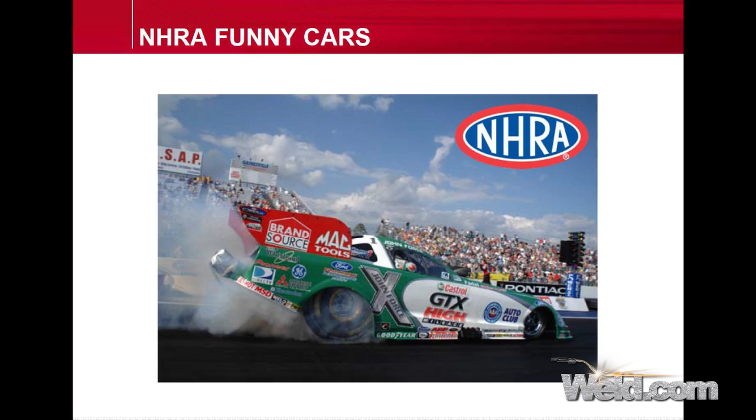But I just want to show you a few people that are using it right now as we speak. Okay, now this particular car is a funny car. It has the same engine, 10,000 horsepower, but it's shorter. Now this car rarely has a problem because it is shorter and it takes the torques and the loads and everything else. But before we go into the next slide, I need for you to show me something that happened back in 2006.

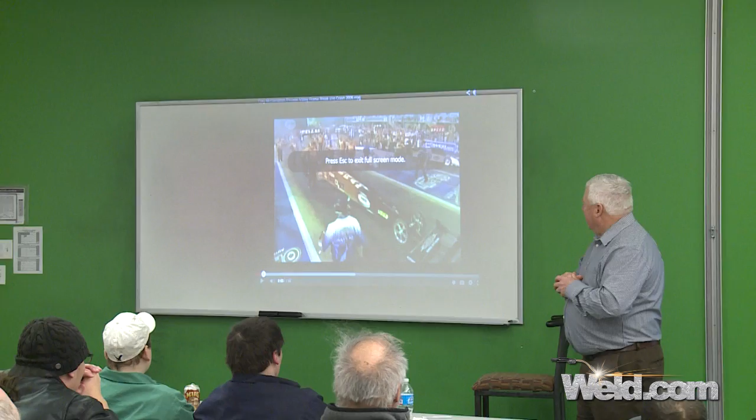Now this happened to be a guy, his name is Cory Mac, and he was driving this top fuel dragster, the long one, and he had a failure. And I want to see if you can recognize where the failure took place, because this is all part of this class. You have to pass this test, okay? There's only going to be a couple questions on it.

Cory Mac called me. He said he had a bad crash, and you'll see it in a minute. But he said it's really strange. The tires have a tendency to blow in these cars. They're running at 9,500 RPM. So when a tire blows and it just gets a little bit of rubber slapping, we've lost drivers because of that. So now what happens is almost every car that has a crash, they blame it on the tire.

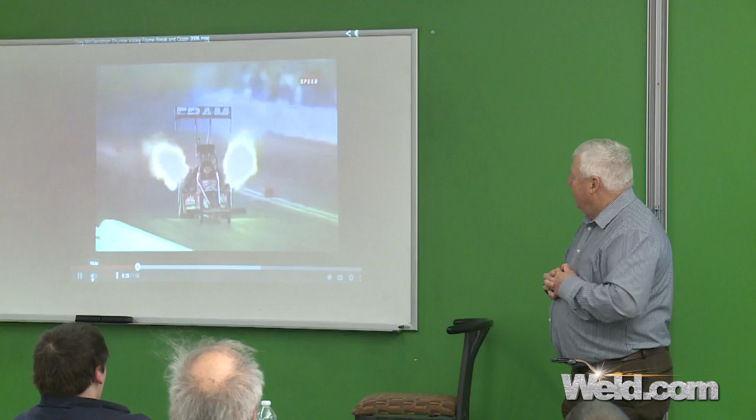Now watch this. Oh my. 300 miles an hour, and he has this type of a crash. Now that you know that he called me and he said that he felt his butt dragging on this crash, look real close at the bottom of the car. Something is dragging there. You see it?

Now look at Cory. He's up here. He's almost at 300 miles an hour. That's not a good day.

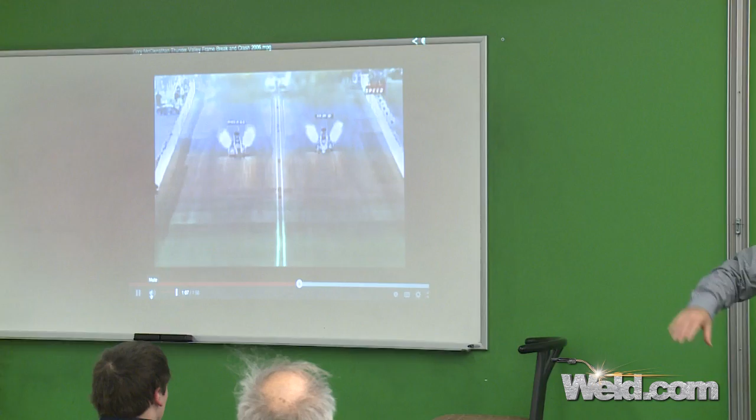And they'll show you one more time, I think. These are only like little 2-minute clips. It is a good day he survived. He did, and it was unbelievable. His sense of humor right after that was as normal.

I think I'd pack it in about that. What do you think, Marty? Yeah, oh yeah.

Now, this leads up to a crash. I got to tell you about 2004, St. Louis. There was a guy by the name of Darrell Russell, and Darrell died in his run. He had a tire blow, and the explanation was that it's just what happens in racing. It happens. He blew a tire, and it was blown off. There was no longer a safety issue until this crash came up.

Now we're 2006. Still, nothing was done because nobody knew to do anything. Now, we know that there's a problem here, because the frame is so long, we know that it may snap, it may twist, all kinds of crazy things can happen. But in 2007, and we just keep going up in the years, still nothing has happened.

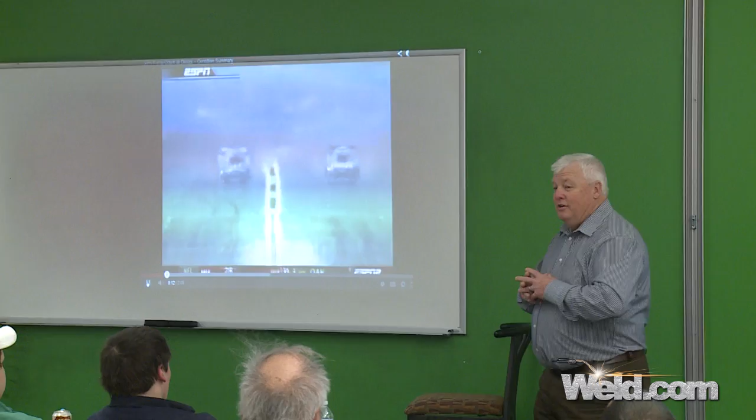I want you to watch it very closely, because when he gets to the finish line, watch the camera and how it zooms in on the car. And just so you know, John Force isn't with the car. So he crosses over, he hits Kenny Bernstein. Had a bad day there. The safety team chases the car.

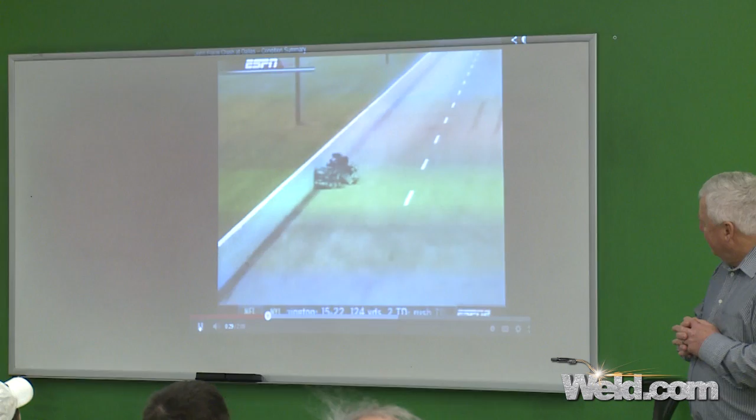I remember that race, yeah. Okay, so the safety team, he gets there very quickly. He's not in the car. So let's watch it again. Watch what happens to the back half of the car, because the camera guys don't even catch it.

So he hits 315 miles an hour. He hits a button. We have two parachutes that come out. They don't come out at the same time. They're offset purposely. So they come out, and the G-force, the reverse G's, is so much that the car splits in half. He stays with the parachute and the two back wheels.

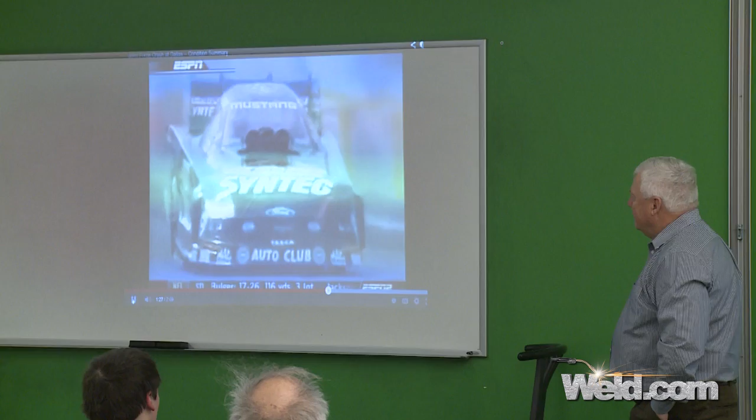So he stayed with the parachute. He came down, his knees were dangling over the frame. When he came down on his kneecaps, hands and knees, he had leather gloves, which did very little. He had a broken ankle, it scraped off his kneecaps. He was in bad shape.

And it was kind of crazy because what happens in a crash like that, it goes through a full investigation. And believe it or not, they're insured. These guys are insured. So the insurance company comes in and says, don't touch this car, leave it alone.

We're going to find out, we're going to get to the bottom of this, because we're having to pay out all these big dollars. They investigated for about 3 months and came up with nothing, zero. It's racing, tire blew - same excuse you hear all along. All along it's been the tire.

Until John Force called us directly. He was in the hospital, no longer in a coma, he was in pain, but every once in a while he'd hit the button and the morphine would go in and he'd laugh a little bit. So he called us and said, hey, you guys still up for the investigation on this? We said yeah. He said, I'm mad as hell, I lost my godson, I damn near lost my own life. Is there anything you can do to diagnose what the problem is? I said, we'll give it a try.

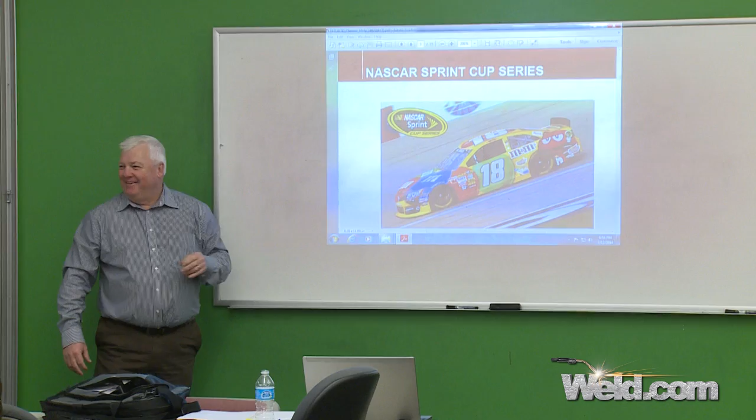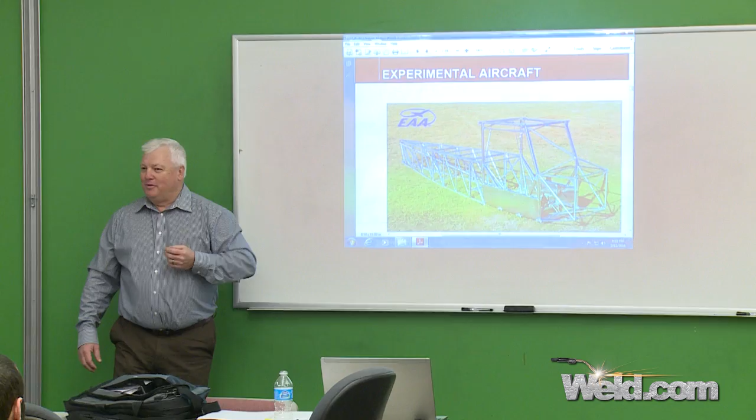IndyCar uses 4130 Chrome Moly. Keep going, next. You know, these guys, that's the bad guy - they're starting to use 4130 Chrome Moly. It took many years. Go ahead to the next one. Experimental aircraft, they use 4130. Go ahead to the next one. Okay, I'm going to stop here for a minute, we'll go back to this in a minute.

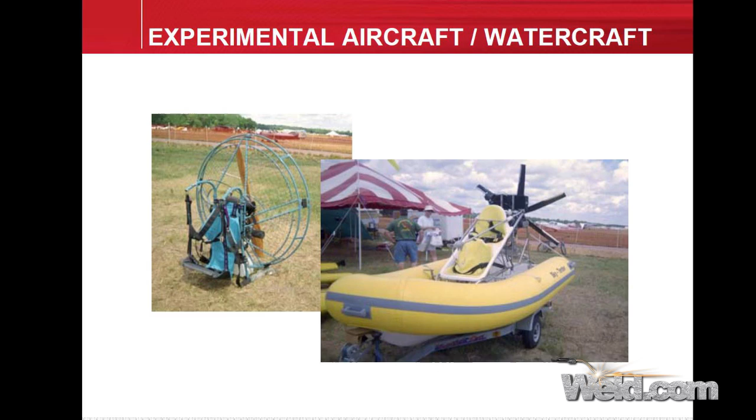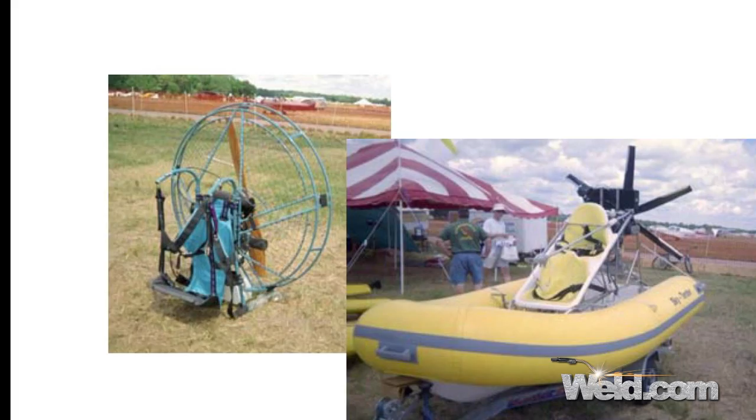This guy right here built his own powered parachute. He won the long distance contest. This particular parachute is a strap-on, you put it on your back. It's about 28 horsepower, and he's got hand controls. He's got the parachute on the ground, and he takes off running, increasing the horsepower or prop speed on his back. By the time he hits step number 6, he's airborne - he runs like crazy, then boom, he's up, over the trees and going. This runs at 26 miles an hour, not very fast, can't get any more out of it. 26 miles an hour - I happen to know, I own one.

But this is crazy - if you build your own, boy, you better make sure you welded it correctly. So the guy's sitting there with this little dinky trophy and the biggest smile on his face. He said, I won the long distance contest. I said, from where? This was Oshkosh, Wisconsin - 800,000 people go through there. He won the long distance contest for powered parachutes, meaning he left his house and went further than anybody else. I said, where do you live? He said, Chattanooga, Tennessee.

700 and some odd miles. Chattanooga, Tennessee, 26 miles an hour. Now what happens if you get a 30-mile-an-hour headwind? You're going to Florida. So I said, you know what, I got to ask you, how did you plan this? And he says, it wasn't hard, he just follows the highways.

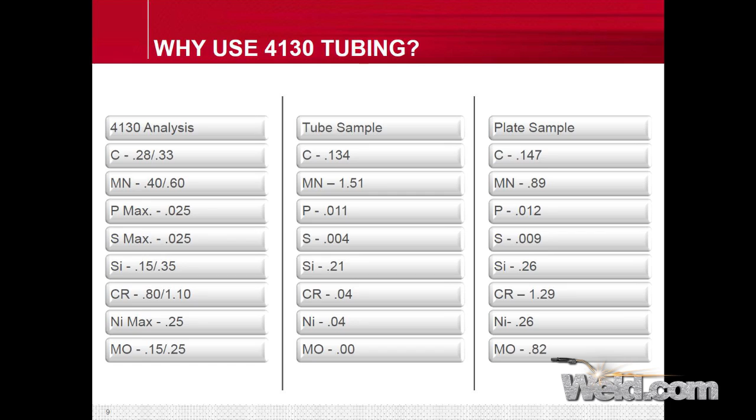Okay, now this is really getting to the crux of metallurgy and what things are all about. We're going to talk about this alloy only, right here. There's a couple other samples, and metallurgically we test them out, and we don't give them a stamp of approval until they've gone through thousands of hours of testing. These other two alloys, everybody's trying to knock off number one. 4130 still is number one.

Now, what makes it so valuable? And this is on your test, just so you know. 4130 Chrome Moly has got high strength. So why did you buy 4130 instead of mild steel? They look the same, they smell the same, they weld almost the same, but one's stronger. So why would you spend twice the amount of money on 4130 as mild steel? Any idea?

Lighter. I'm going to use less to get more. You can buy thinner wall material, and your car is lighter, your aircraft is lighter. So it's strength to weight ratio. So if you want to improve anything in racing, you go lighter. And the only way you can do it is to take a look at the metallurgy, and we're going to show you what that is.

They hear about it all the time, but this is really what 4130 is all about. It has a carbon content that is somewhere around 30 points of carbon. Doesn't mean much to you yet, but it will. It has a few elements in it that are pretty normal. See the CR right here? That's chromium. So if you hear the term Chrome Moly, it's not like it's got a lot of chrome in it, it's got 1% chrome. And it's got, look at this, moly, a quarter percent moly in it. But when you take all those ingredients and put them all together, you get some pretty good properties.

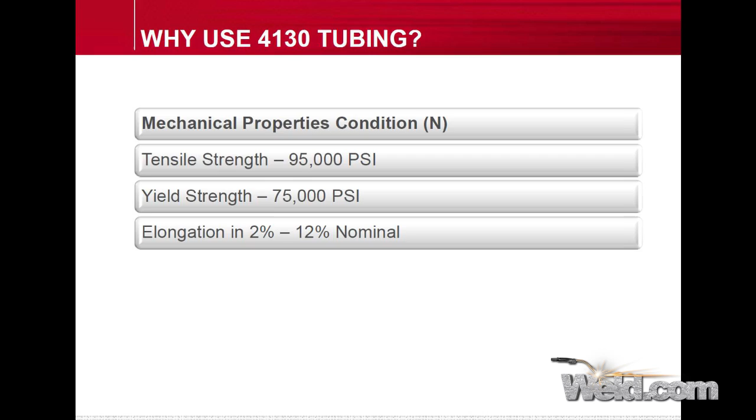So let's go ahead and show the next slide. Here's the properties that you get. You get tensile strength and you get yield strength. Now I want to show you what the difference is. Tensile strength, remember that, 95 KSI, thousand pounds per square inch. If you put this on a machine and clamp onto the material and pull it, that's what it'll measure.

Now this material will actually start to give up the ghost before that. It'll start to stretch and get plastic. It'll stretch and stretch and stretch. When you see it stretching, it's at 75,000 pounds per square inch. It's pulling, and then boom, it'll quit. It'll give up, it'll break. And that's your elongation. So this material has about 12% elongation, whereas a rubber band has more.

So it's not just going to snap, it's going to move and then snap. And that's important. We're talking about NHRA, what happens when they drop the clutch? They need something, they need to be able to flex. They can't have it rigid. If they have it rigid, it's going to go boom, just like that.

So just know, this is a condition called the N condition. So 4130 in the N condition. So we bought that because we want high strength, lightweight. So go ahead to the next one.

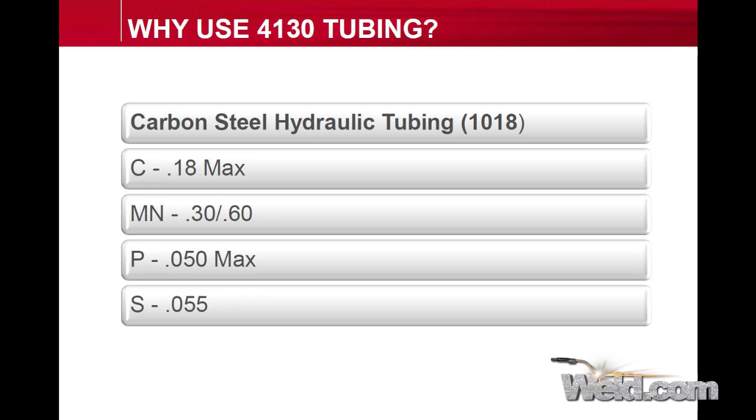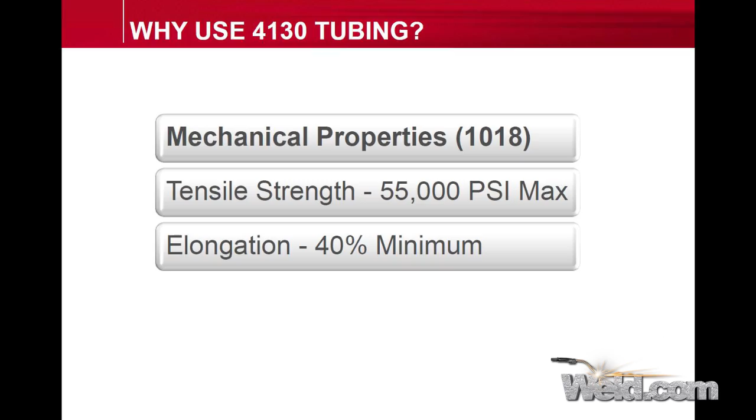Okay, now let's take a look at tubing, mild steel. You can go down to any metal mart and buy this, 1018. The only thing that's in it is a little bit of carbon, 18 points of carbon. These are all just elements that are there for the processing of steel. That's it. So let's see what the properties are. So what did we say 4130 was? 95 versus this right here, 55. So you can reduce the wall thickness considerably.

You can almost cut out, I'd say roughly about 30 to 40% of your weight just by going to 4130. Just like that. And now you got a fast car.

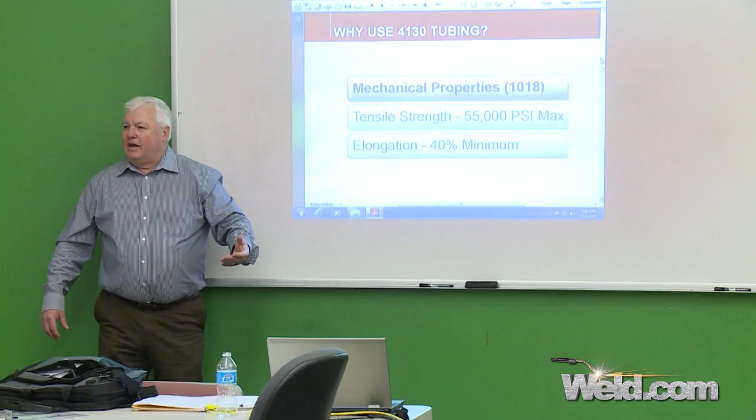Now this right here, the reason it's so attractive, notice this, 40%. What does that mean to you and I? That means you can take this tubing, mild steel, and bend it, do all kinds of things. But is it strong? No, not very strong at all. Unfortunately a lot of roll cages get made of this, and it's a false sense of security, because as soon as the car rolls, it snaps off the cage. It doesn't have the strength. It looks good, it was easy to bend. That should tell you something. If it was easy, don't do it.

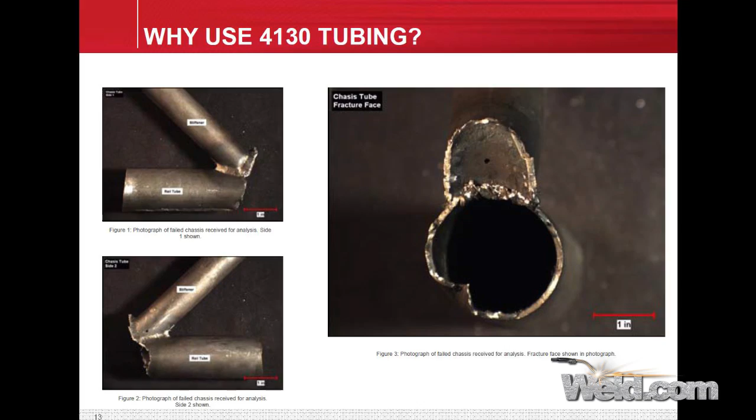Okay, now we're going to get into a crash analysis. When we cut a section out of this car, this is what it looked like. This is tubing, and you're going to see clusters of tubing, a main frame, and tubes coming in at different angles. So that's what we did, we cut into a couple of different tubes. Our whole objective, first of all, is just to look at it.

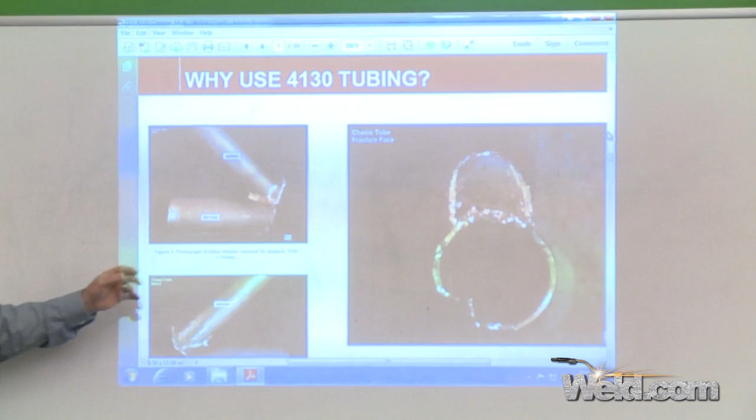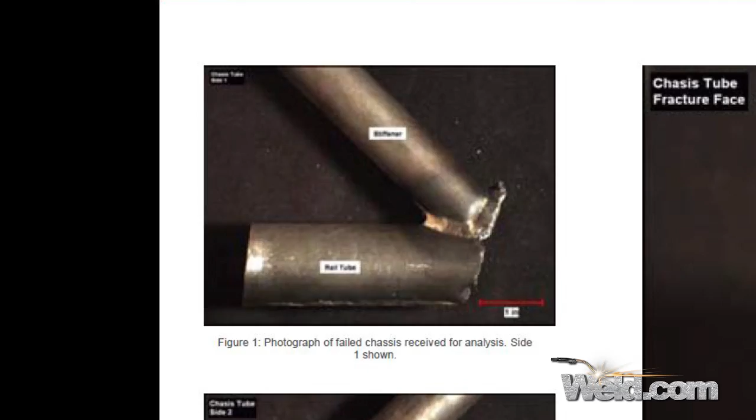If you look right here, you'll see a weld. What we're trying to do is eliminate the welder right off the bat — the person who welded that. Is this a good weld or a bad weld? There are not a lot of characteristics that look bad on this. In fact, this sharp edge right here turns out it broke in a heat affected zone, and that's the weakest part of a weld, and that's where it's supposed to break.

That's not going to change. You're going to weld it that way, I'm going to weld it that way — that's where it's going to break, the heat affected zone, where the liquid line goes down to the metal. Very normal, think nothing of it if it breaks there. You've got it under design if it's breaking.

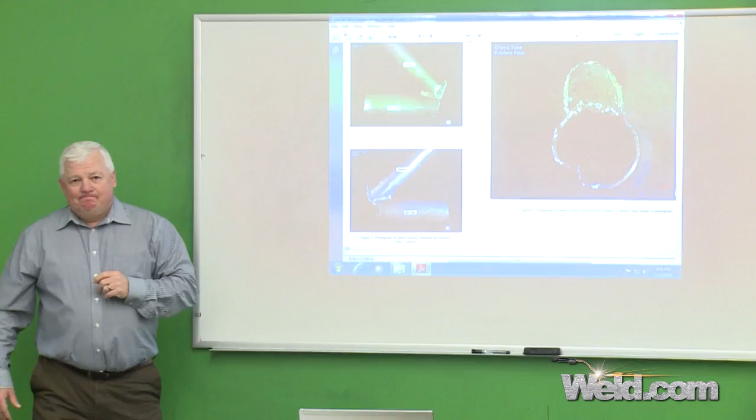So take a look at this. I don't see anything wild and crazy. I looked right here. Nothing I could really jump up and down and say, yeah, that looks terrible, or that's a problem. So we looked at the end view — still nothing unusual.

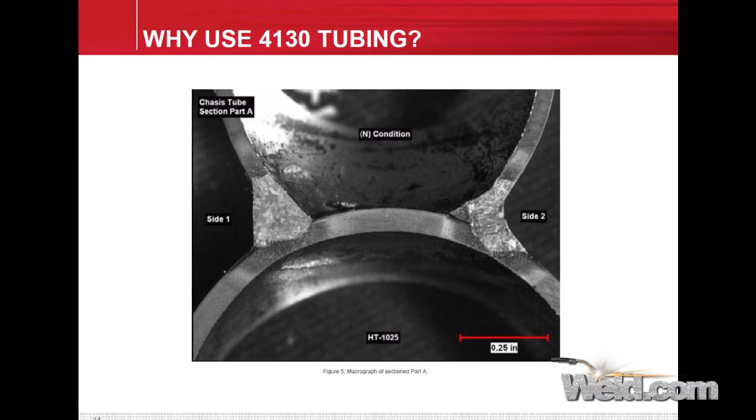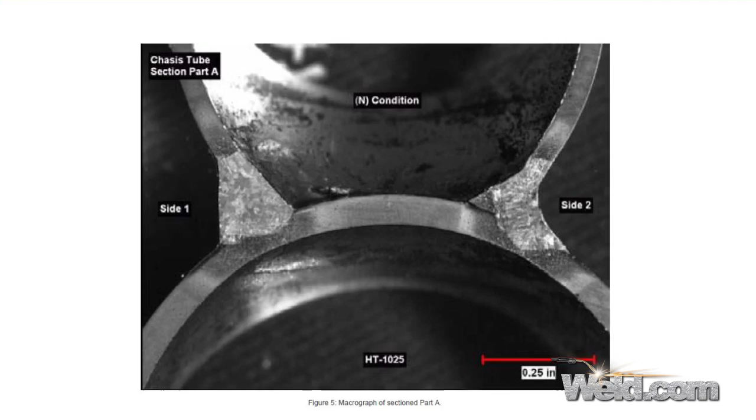Now, the beauty of having a lab is we have a spectro analysis machine, a scanning electron microscope. We're talking millions of dollars for these things, and I have them at my disposal, so it's kind of fun. Okay, so let's take a look.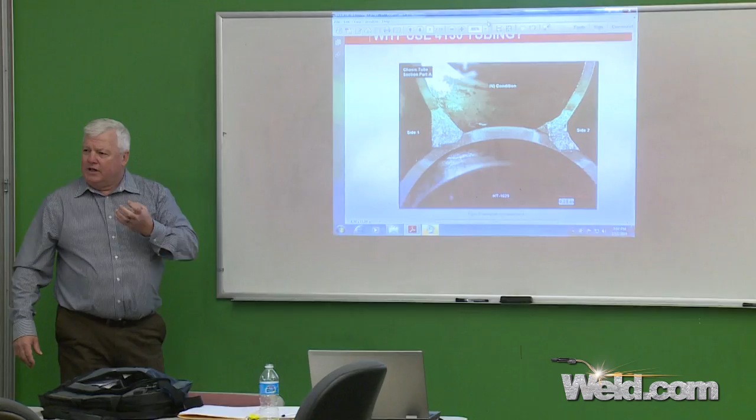This is a weld — you can see a tube came into a tube. This weld right here, kind of a triangular shape, there's absolutely nothing unusual about that. The grain that you get out of a weld is kind of a mosaic pattern. If you look at that, you can see the grain is pretty consistent in size. Nothing terribly unusual.

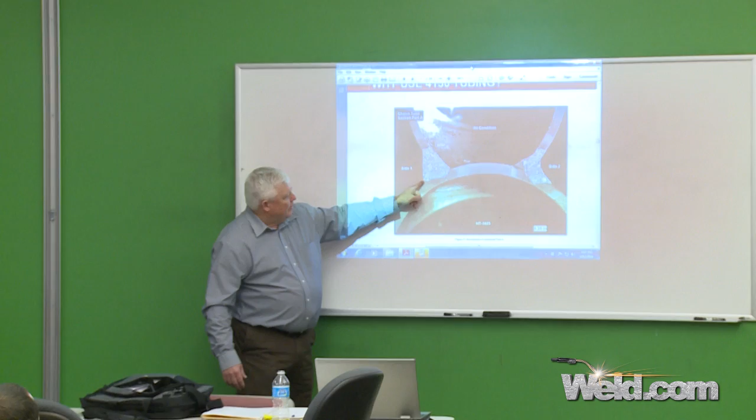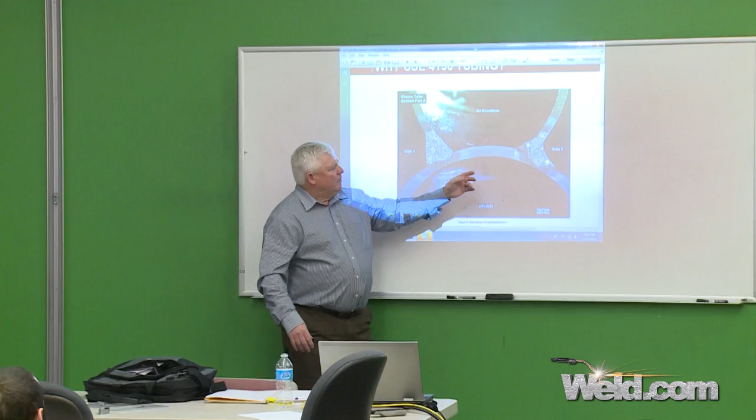I looked at that area right here. You look for a sharp notch, a line — maybe it didn't wash out correctly, maybe the guy didn't add filler correctly. I didn't see that. Now I moved over to this side, and you can see it didn't penetrate all the way through, but it didn't matter — it held up, meaning the weld was good. Even though it's a little bit dished out, it's very smooth, the transition is smooth, no sharpness at all. So the nugget size was large enough that the failure didn't happen there.

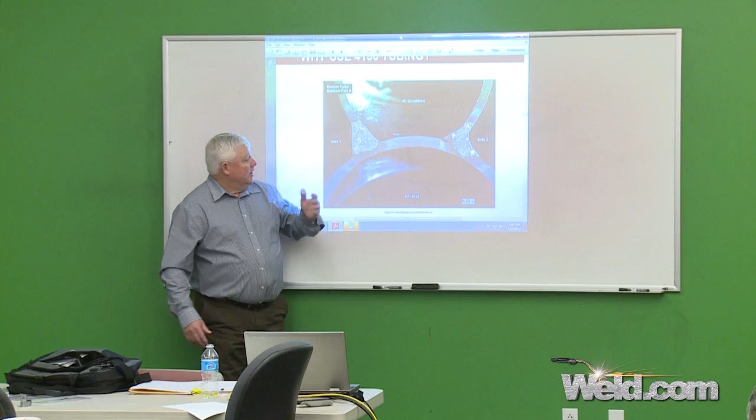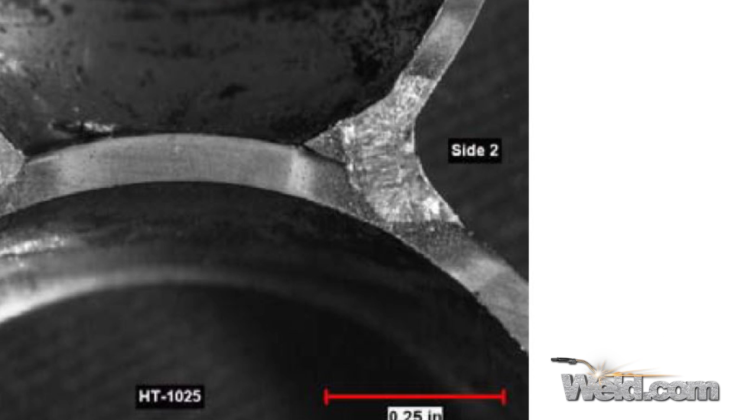So again, we're looking at this thinking there's got to be a smoking gun here, something is wrong. And if you look real close, I don't know if you can see it — this kind of gave me a trigger. Take a look right here. There was a color change there. I thought, it's got kind of a white spot to it, but I couldn't tell exactly what was going on until I started looking a little bit closer.

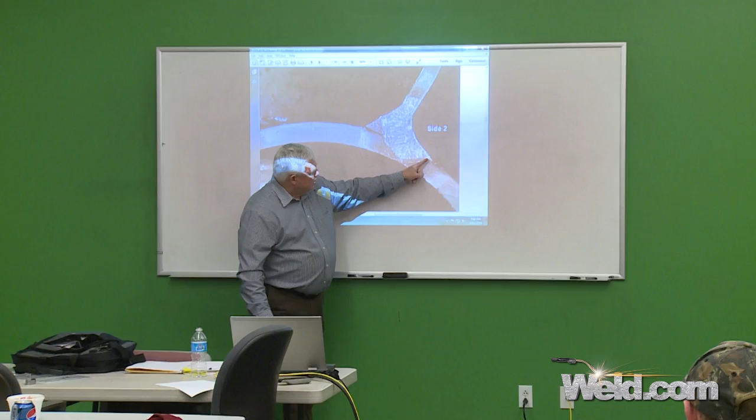You see a shade difference here, a shade difference here. Then I started noticing — well, there's something weird right here. I don't know what that is, but it is weird, it is different. So then I decided to blow it up to about, I don't know, 200 power. And that's the next one.

And there is the smoking gun. Here's the problem.

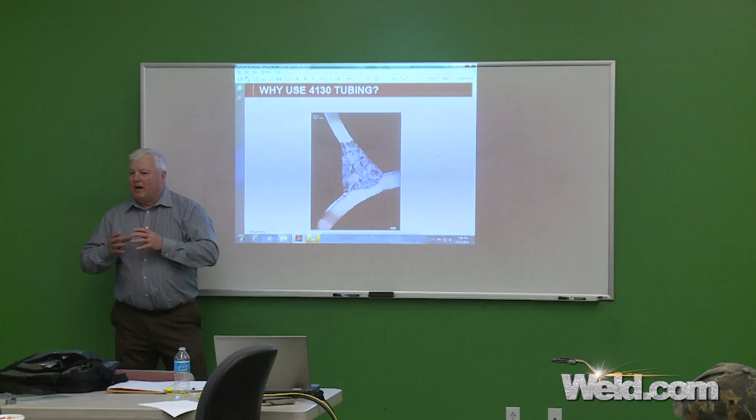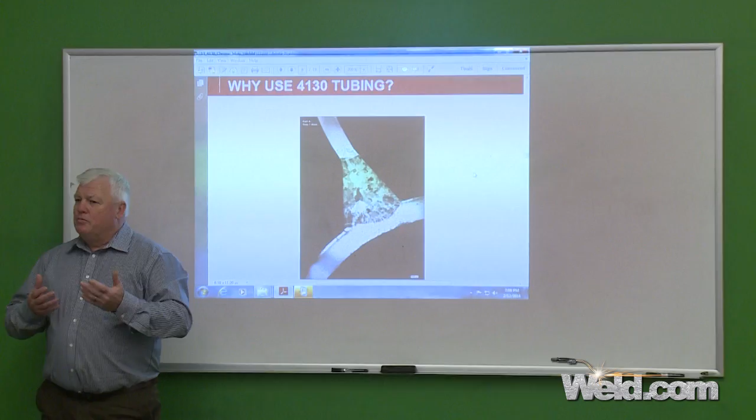Anytime you have a high-performance vehicle of any kind designed and developed, there's very little margin for error. If you're developing something like an NHRA dragster, the margin of error is about 20%. You don't want it as heavy as a tank because you want to go 315 miles an hour, so you got a 20% margin in there.

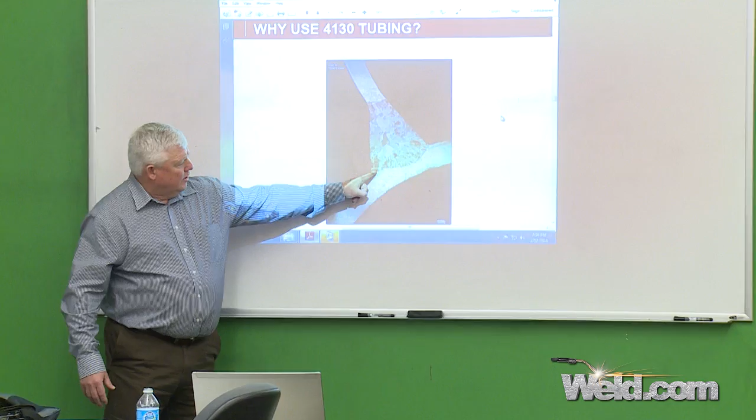Now what happens if you screw up the metallurgy? You're already right on the edge, right on the edge. And something, I don't know if you can see this crust right here. It's kind of hard to see, but see the roughness here?

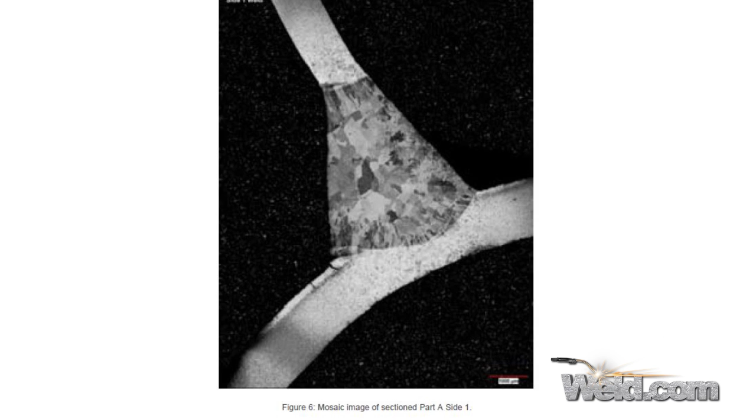It's called a decarb layer, and that decarb has no strength whatsoever. In fact, you have to deduct that from your design, from the strength of the material. We're already on the edge, and whatever process caused this, this was caused by heat.

Don't know what caused it. Don't know if it was an oven. Don't know if it was a rosebud that a guy sat on there and laid on it too long. But that can happen. You had a question on it?

Is that like a natural phenomenon of case hardening? Very much like case hardening, yeah. What it is, you're exposing this material at a hot temperature and letting oxygen attack it. And when it does, it's decarburized. There is nothing there in value.

So not only is there nothing there in value, but this material right here, it's got cracks that are already propagating. So all you need to do is do something phenomenal, and it's going to crack and break. So let's take a look at this.

2004, we had a problem. Not sure what it was. 2006, Cory certainly had a problem. Wasn't sure, but he couldn't agree with NHRA that it was a tire. What he was claiming was that something in the frame broke. NHRA was saying, no, it was your tire. We got the cameras to prove it.

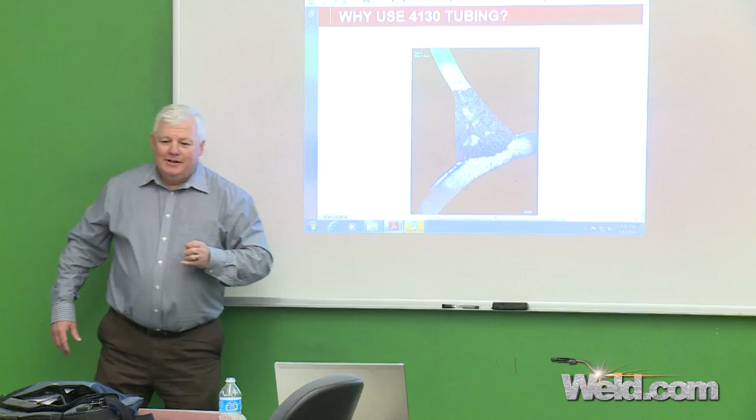So what this caused was a chain reaction, and I can tell you this kind of put me on the hot spot. I went to this show called the PRI Show, Performance Racing Industry. It was in Orlando, Florida. And I was summoned to come and visit the NHRA SFI committee.

Anybody ever hear that? All these racing organizations, they have a little sideline organization that takes the responsibility. They don't take it themselves. They have a quality control group. And so this report ended up being somewhere around 130, 140 pages.

And it was handed to a guy by the name of John Medlen. Ever hear that? John is the dad of Eric Medlen, the kid that died. I said, John, do with it what you want, it's up to you. I didn't show these presentations until after Medlen said it was okay.

So anyway, after this presentation, the whole group got together and said, certainly we've got a problem. You found what it was. What do we do next? And what happened next was a great thing.

They redesigned the car. There used to be 2 rails running the car, there's now 3 rails in the main frame. The cars were only lasting 15 races, $80,000 a frame. They're now lasting 115 races.

So you can see that it's going to be safe, and somebody's going to have this conversation 30 years from now, and the same thing's going to happen. Horsepower is going to go up, frame's going to be weak, there's going to be something that's going to cause a catastrophe, and they'll fix it. And that really is racing. It's sad, but it's the truth, and that's the way it happens.